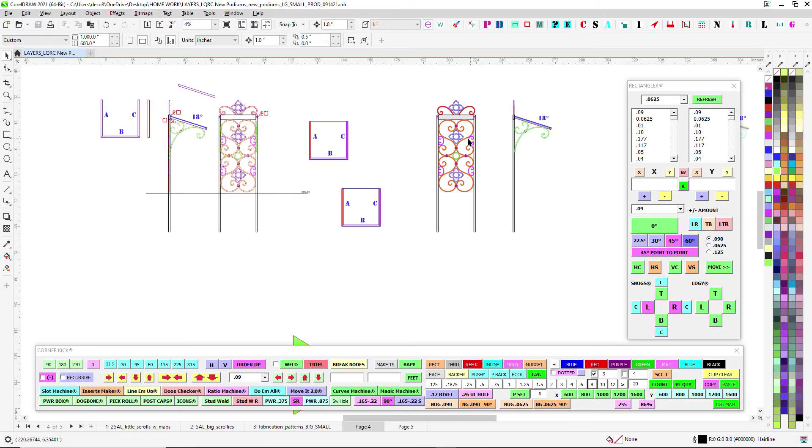All right, so let's do a quick one here for La Quinta Resort and Club. Couple of these little map kiosk things. Not much to go over, just some ideas or advice from what I can remember. We're doing this old school, taking it back in the day, get back in the Wayback Machine, the before times here. Just starting off with this picture.

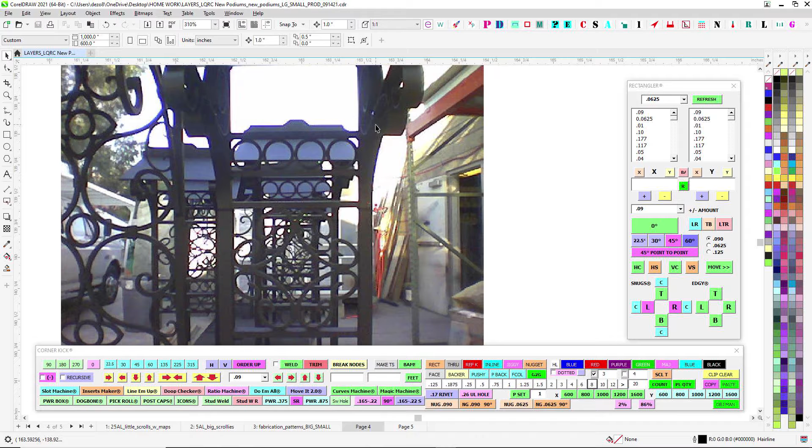Just for reference, this is one of the first things I barely even remember doing, if at all. I believe these were already all done when I first started, so these are one of the first things I took pictures of. This is the small version, these are my two examples or photos. And you can barely see the big one here, which again I don't know if we made these or somebody else made these, because these are supposedly steel and these are aluminum. I believe we made these because I kind of remember butcher paper patterns and stuff like that. So anyway, these two pictures help.

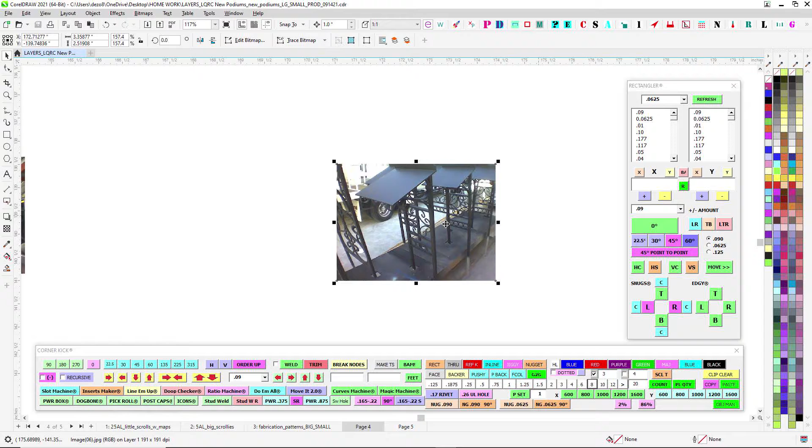Otherwise, I think JR sent you a link. They're in sales pics, there are current photos. Somebody, I think Johnny, went over and took pictures of these over there, so you can get a little more reference. But that's just an idea.

So what you're going to do is lay of the land. You're just getting 1/4 inch parts, this is for the small. You've got the scrollies there, and then you've got the two map plates there. You'll have the 1/2 inch parts for the bigger one there, and then this is where it all happens.

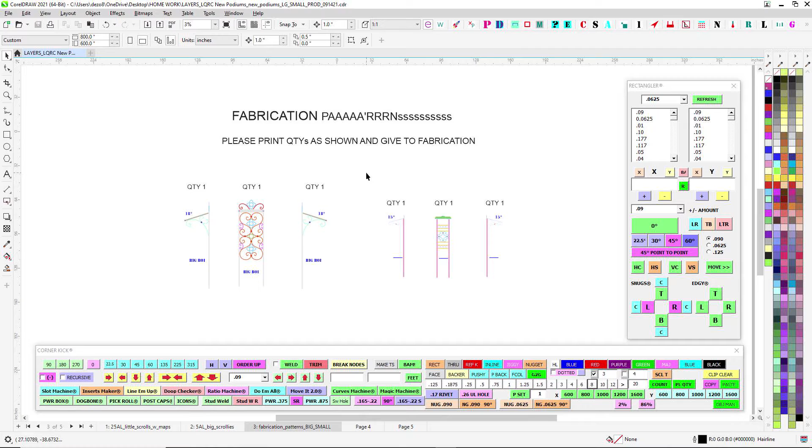So this is, like I said, this is taking it back. Nothing we can route that will click together, so you're going to have to do this all on your own. You can do it. So you're going to get one of each of these patterns, butcher paper, and that's going to allow you to lay this out and get it all squared up and figure out where everything goes when you go to tack it together.

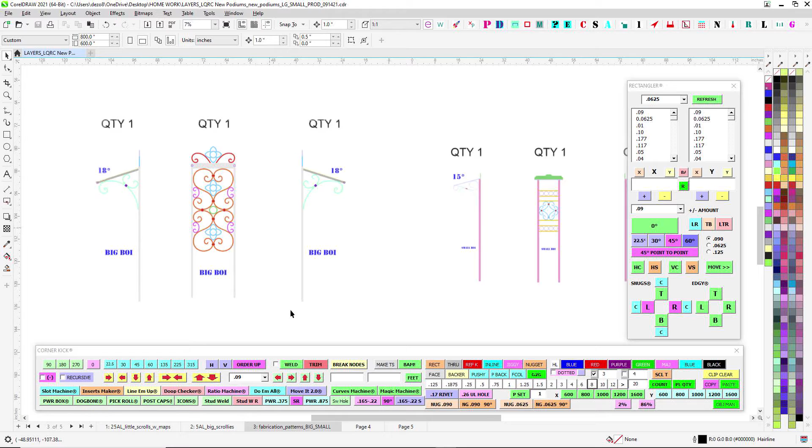But yeah, it's pretty straightforward, self-explanatory. You're going to cap the ends of this one by one, and then get that all capped up. I would weld it shut, and that way you can grind and weld on it without the welds letting go, because you're going to have to weld directly to this once you get this put together.

So you're going to have to chamfer this edge here on this 1x3. You're going to have to weld that good. You're going to weld under here and all that, and then grind it smooth. So you're going to need to make sure it stays together. But like I say, you want to make sure that this is all capped first, and then you can go ahead and make it look like it's all one piece.

And then once you get that all taken care of, you're just going to be butt welding the frame for the actual map plate right there. At which time you're going to make sure that you can also fit these in there, and then you're going to burn all your scrolls.

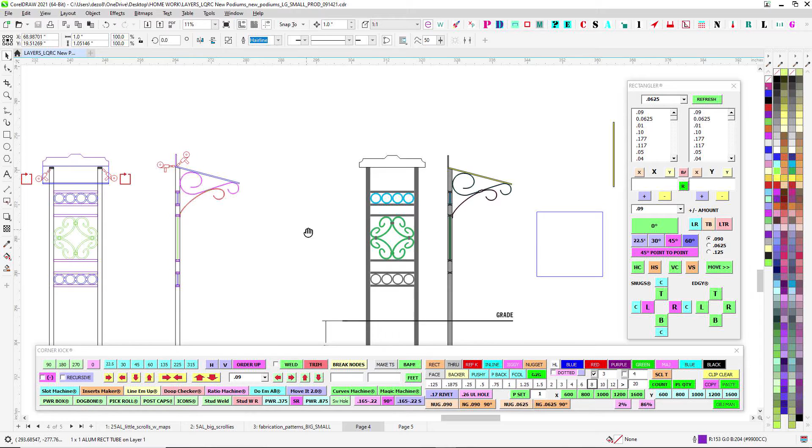You're going to make sure all the scrolls are in the middle of the metal there. So you're going to make sure that you put your 1/4 inch on one side, lift it up off the table, and burn it all in place. Same thing with the little guy.

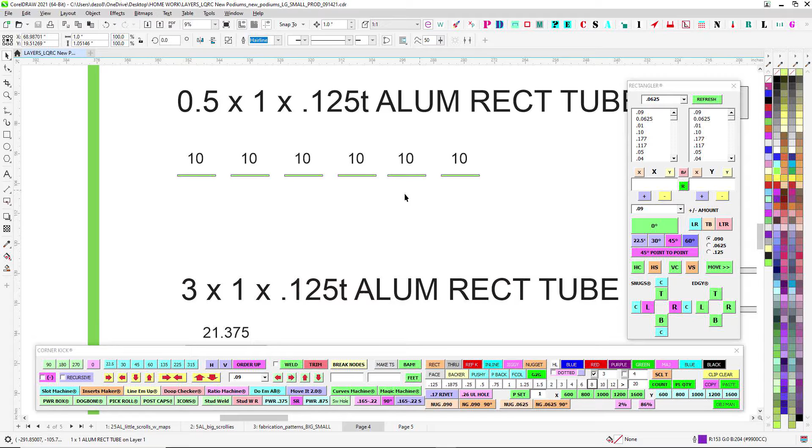You've got your pieces here, so here's your cut list. You've got your 1x1 by 1/8 inch square tube, so you got your two legs for the big dudes, you got the legs for the little guys. You got your 1/2x1 just for the little pieces in between, and you have a single piece of 1x3 for the top of the big map.

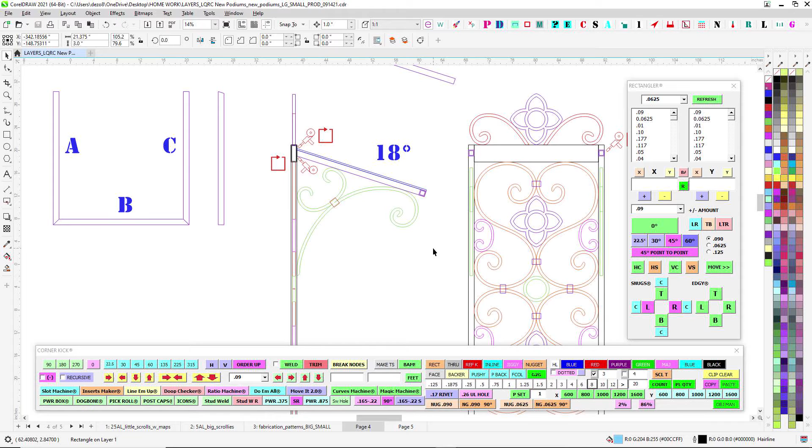These guys here are compound cut. So not to make it more confusing or anything, I'm just letting you know that you're going to turn these and do 18 on one end, 45 on the other. So that's laid out here. Looking at it from the top, you have part A, part B, and part C. So obviously you just do your normal 45 for that part, but then you're going to make sure you turn these the proper way, so that way you get an 18-degree cut so that it slants down.

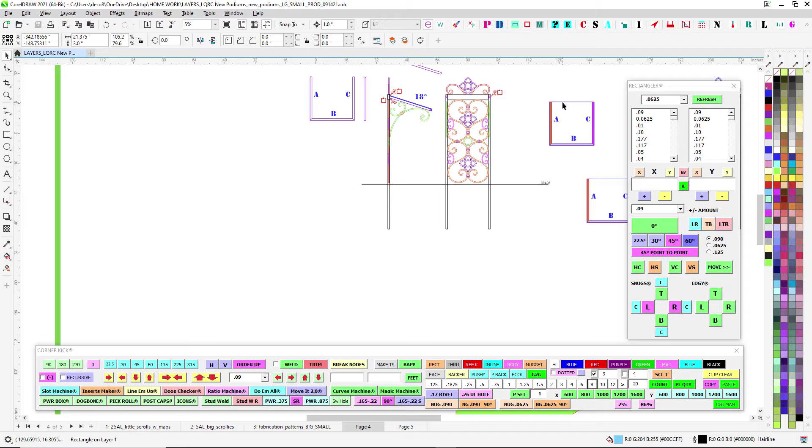So A and C will be cut opposite each other, but you've got to make sure you turn it the proper way for your 18-degree cut. That's why it says turn 90. So anyway, A and C have a compound cut, but make sure it ends up being 21 and 3/8 all the way around, that way you can put your map plate right on top.

Again, these are all 100% welded. You're just going to tack - this piece here is separate from all of it. So you're going to put that in there, burn it there, burn it there, burn it to itself here, burn, and then put this guy in there, make sure that touches, and burn it there.

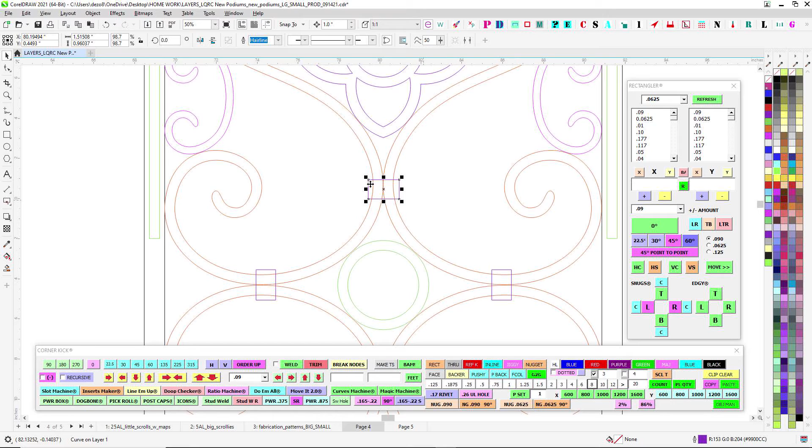So it's going to have that wrought iron look. There's nothing pretty about it per se - I mean, it is, but you want to make sure it looks nice - but it's all going to get painted black.

So then my advice too, if you haven't done this yet, is you're going to be putting little straps. Now the straps help hide where the welds are, and it just gives it that finished look. So going back to the pictures, and again, you want to reference the ones that Johnny took as well, but you can see where there's these wraps here.

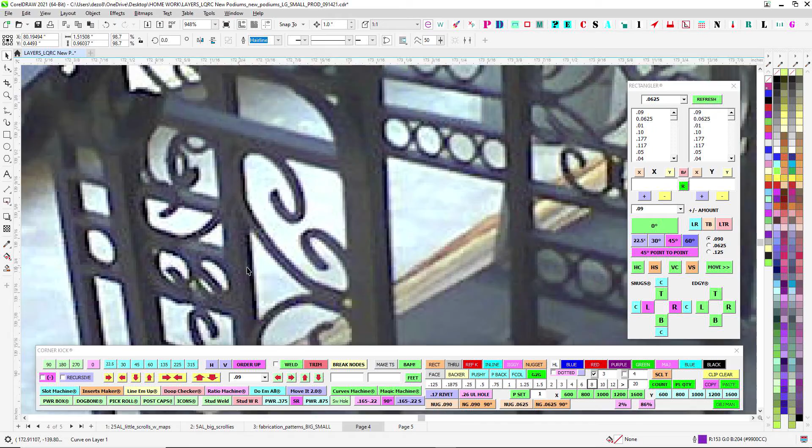Now if I recall, I believe those are either 050 or they might even be 040. But all you do is stamp a piece on the shear and just get it to where you start on the front and wrap it around, and kind of get it to where it's close on the back, to where they kind of either meet or come together. Then you're going to shoot a couple of tacks on the back to keep it shut. But you just sort of use your hands and wrap it around there, or you can use a soft bonker and just try to bonk it around. But yeah, that's what those are.

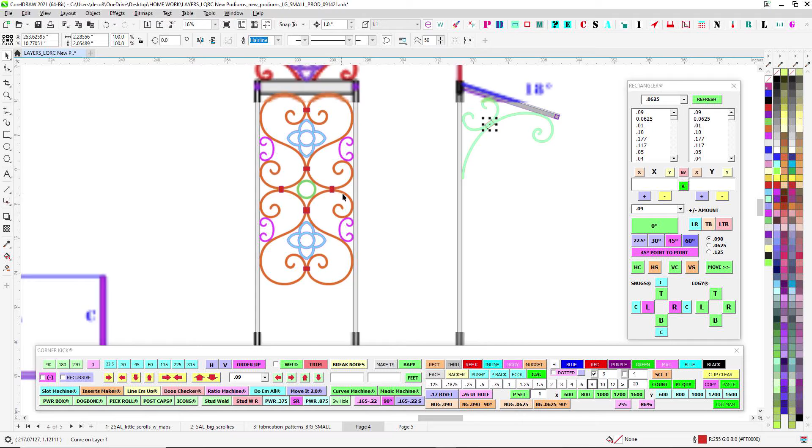So if you see these, it isn't like actual full size or anything - it doesn't have to be exactly like this. It could be a little bit wider, maybe a little narrower or something, but the idea is you'll sort of be covering up your weld here. On some of these as well, like on this piece, this is one piece. So when the router comes in and kind of rounds this out, you can try to open it up a little bit, or use this to try to hide that.

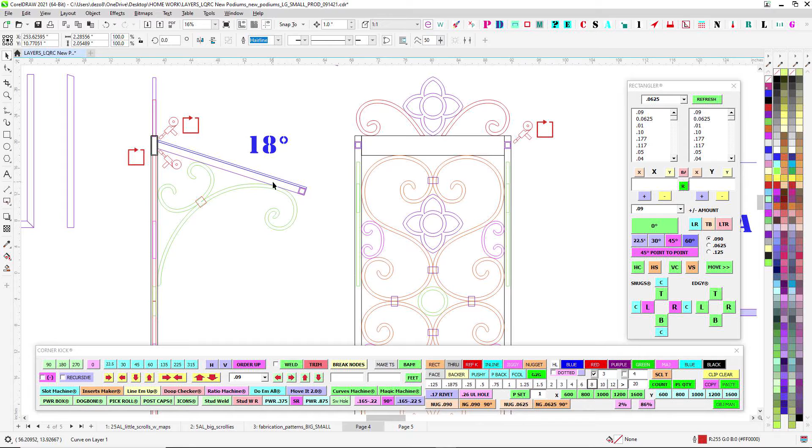Let's see, just grab these nodes. But anyway, so that sort of hides the fact that the router left that kind of opened up there or whatever. So that's the idea behind these things.

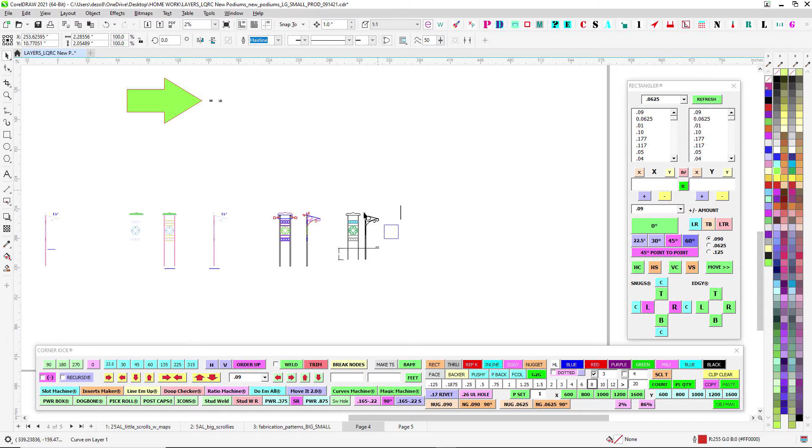When you see these little straps here on the paper pattern, you'll see them - so where you see those is meant to get that little wrap. When you go to do this guy, so this one's pretty straightforward. Use your paper pattern, lay everything out, get all tacked together, get this frame welded on this side, and then bonk it up here. And this little thing means weld all the way around.

So you're just going to burn it because that's really the main strength. You're just going to set it right on there and burn it all the way around. And then you're going to burn this really well there and there to support this. And then you just tack or just burn these, here and here. And that's that. This one's a little more funky.

This guy here, you're going to have your cuts, and you're going to - that's a 15-degree cut there. Actually, you know what, let's do that right now.

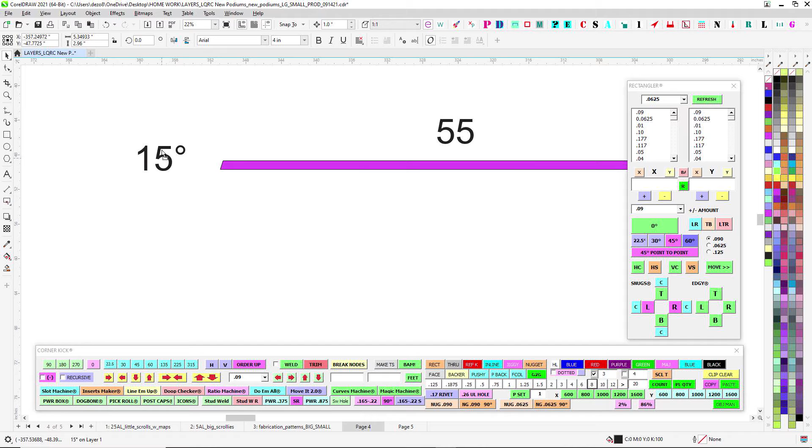Forgot your 15-degree cut there, didn't you? That's what I thought. So you're going to put that 15-degree cut and you're just going to cap it - or no, not cap it, this one gets welded directly to it. That's right.

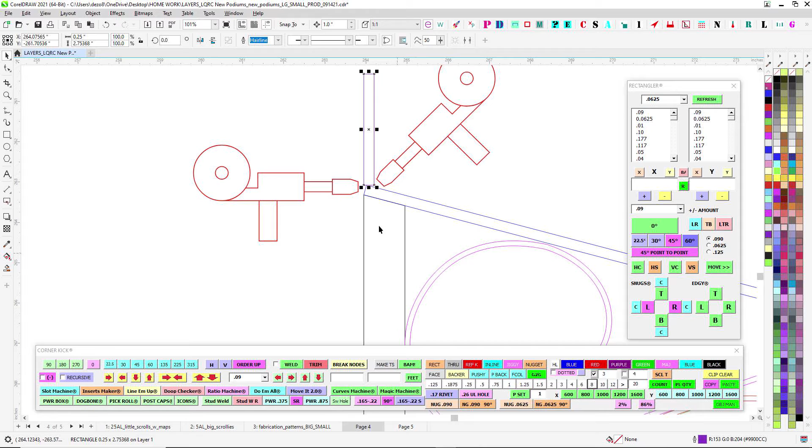So that's 15 there. And that's 15 there, there we go. All right, so that's updated there. So you got 15 degree on that 55, 15 degree on that 55.

You'll just end it right there, burn it all the way around, even on the back there. And then you'll go ahead and put this little plate right on top and just lay it flat on its back on your table, and then line this up and then tack it and get it started.

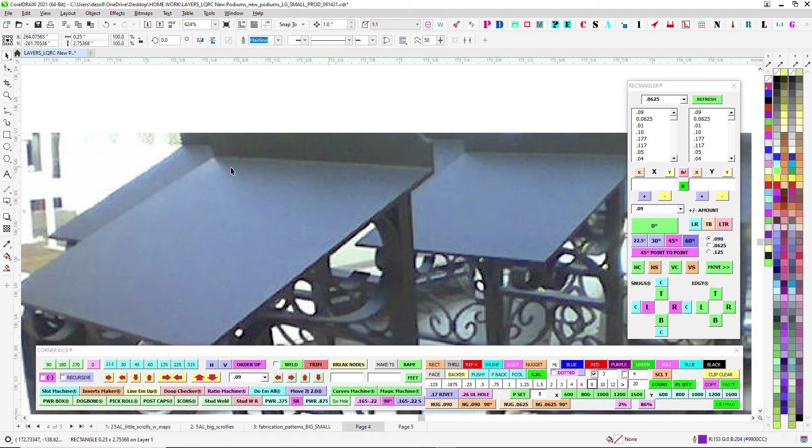Make sure that it's straight, and then go ahead and put some nice welds along the back and some on the front. And then you're going to have to kind of grind it out, make it look sexy, because then they'll just Bondo it. So you can see where that seam is nice and clean.

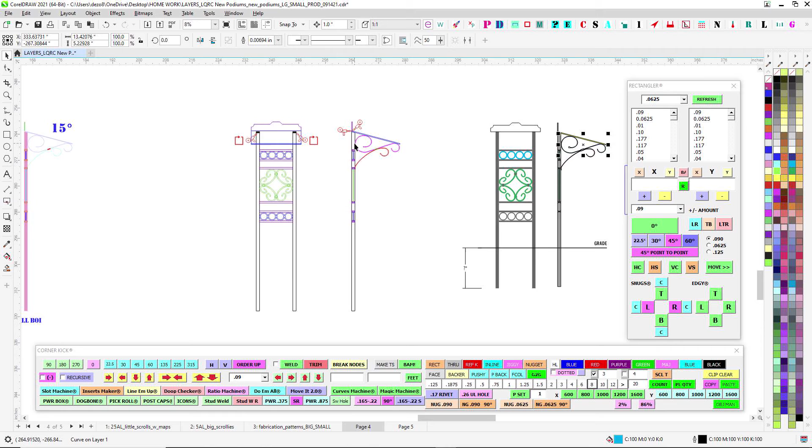So if you're going to put some welds in there, go ahead and put some welds, but make sure that you can grind them smooth. And then that's all just going to get a nice big finger blob of Bondo along the front edge and then on the back edge too.

But it needs to be welded decently. So make sure that it's on there nice and, you put a good strong welds.

So once you get that, the other part of this one is going to be tricky. This is 1 by 1/8 inch flat bar. And then you have to kind of bend it into this scroll.

So use your paper pattern, your butcher paper patterns that you're going to get, and use that to lay this out and make 2 of them.

And then the same thing here. You bend that, you weld this and put it all the way up. And then turn this on its side, and that gives you where you want to get this lined up.

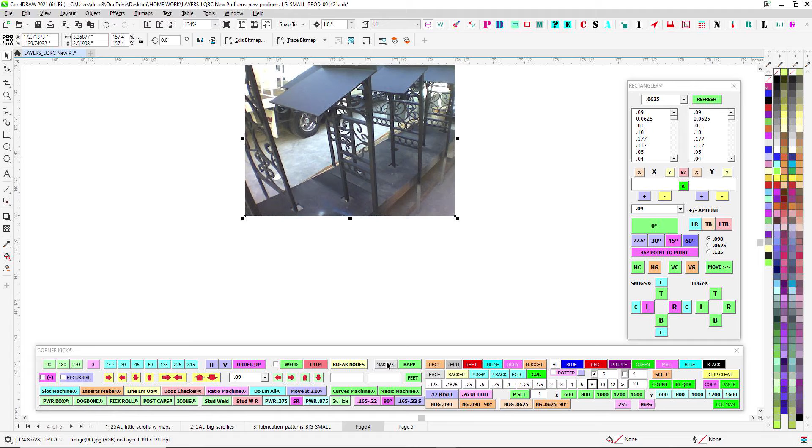Put it on the butcher paper pattern, and then tack it, put it in spot, and then you can burn it really well. You can burn along the top here and burn along the bottom completely, and then sort of smooth it out. I believe in the picture it shows that a little bit.

Yeah, like right here. So that comes down. Go ahead and put a full bead right there, and then you can just kind of smooth it. And then you can tack along the side here.

Anyway, so you're just going to be using these strategic tack points, but you're going to have to make sure that they're welded on there really good as well. So it's kind of a balancing act between leaving your welds and completely grinding them off and losing all the strength. So, but use your paper pattern again to lay out where these go.

So you'll just put your 1/2 inch bar here, put in the little decorative piece, and then lay it out that way using the paper pattern.

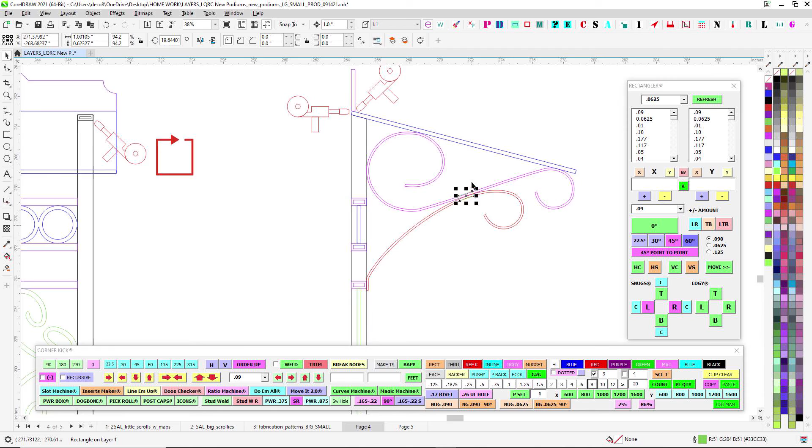And again, you're just going to be using your little pieces there, your little wrap pieces, and use either 040 or 050, wrap those around, tack them from the back.

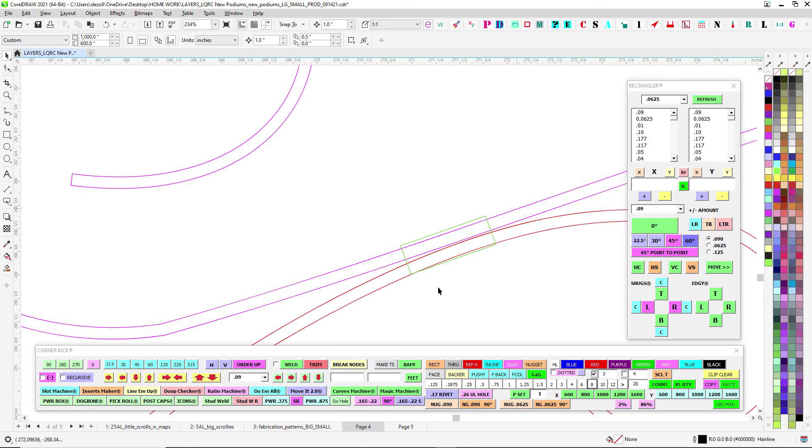And then there is one piece here, so you'll do like a wrap piece and try to get it probably from the top, wrap it around, and then put the seam on the bottom, and then you can just tack it really well. Or you might investigate possibly fudging this one where you just do a 90.

You do a little piece here, like a little bend here and one all the way across, and then do a mirror piece that has one piece all the way across on the bottom, and then like stitch tack the seam closed and then shape it shut and clean it up so it'll look like you wrapped it.

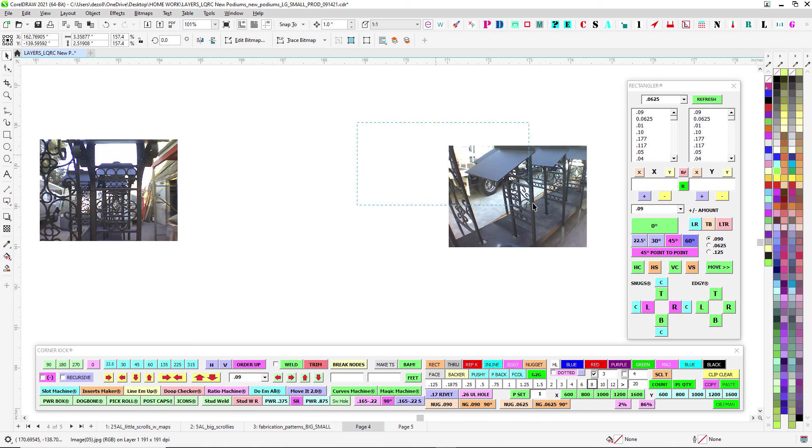But you just do one bend, one bend, and one bend, and one bend, and then wrap it like that. That might work too. But I think I remember possibly wrapping these. But again, you have these in the way.

So if that's the way you got to do it too, maybe if you do like a C-channel piece where you do a little bend, straight little bend, and then close it on the back with another piece, and then stitch the seam here closed and grind it.

So whatever, as long as it gets done, gets painted black, and it looks like the pictures. Again, check sales pics. I think JR sent you a link. If not, you can find it. That has even more pictures of this.

So, but it's all on you guys, man. Old school, doing it like that. So if you have any questions, hit me up.